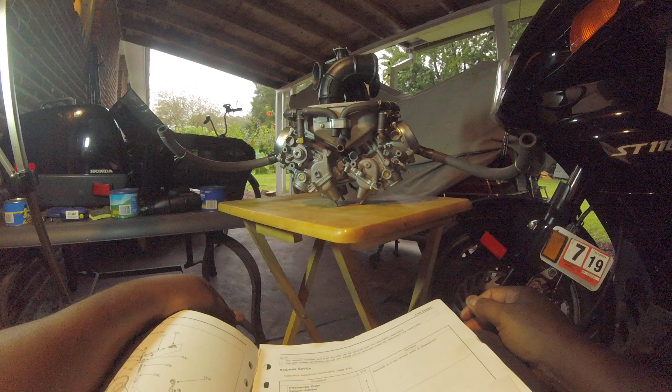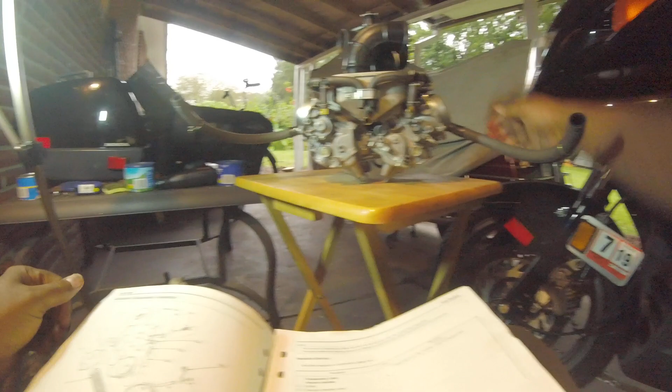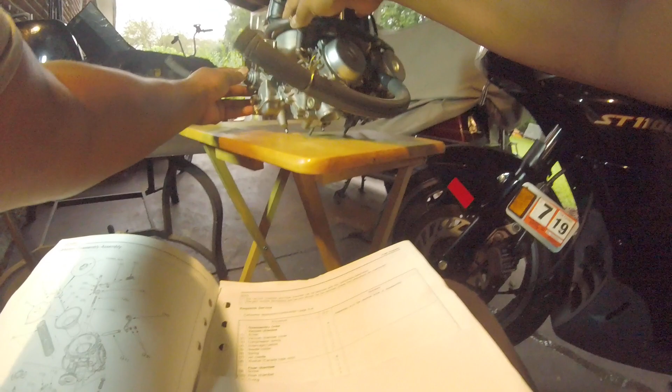Now that I have the carburetors out, here's the assembly on how the carburetors are numbered. Number 1, and again this is facing forward on the bike. 1, 2, 3, and 4. While you have the carburetors out, it'd be good for you to number them just like I have them here. 1 and 3, 2 and 4.

Now when you go to adjust the jets on the carburetor, you need to have this type of tool here. Like I said, they come in 2 different fashions. One has a screwdriver end, and the other one, like the one I have, has a flex end. Now they say in the book that you're supposed to take this flex end, come from the other side, loop it around, stick it on there, and make your adjustments.

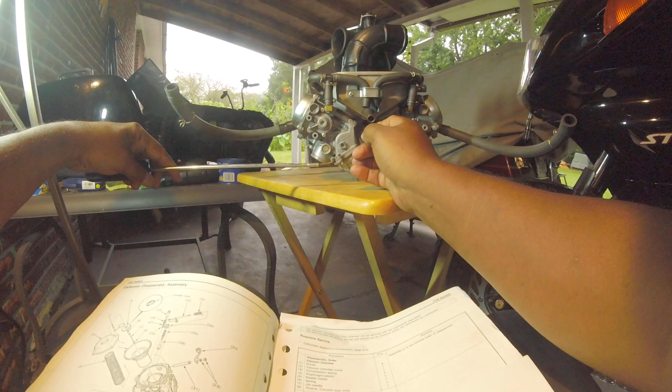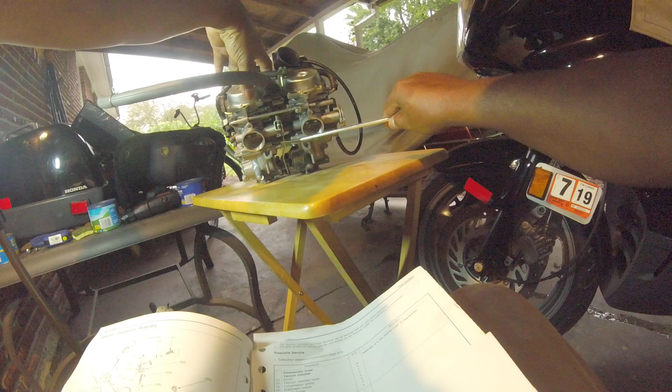It's not possible. The one in the number 1 cylinder is up on the front right. Number 2 is located right there. Number 3 is located in the back, rear right. And number 4 carburetor is right opposite of number 2.

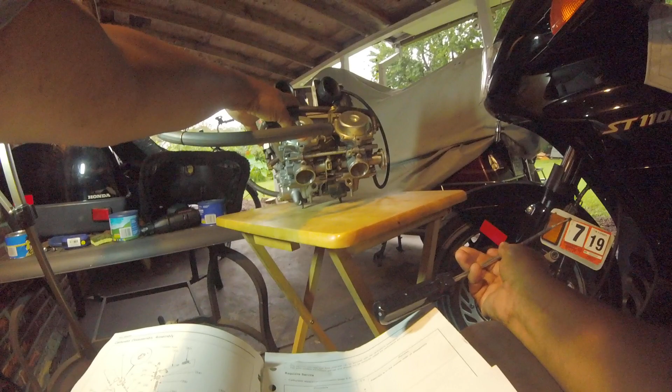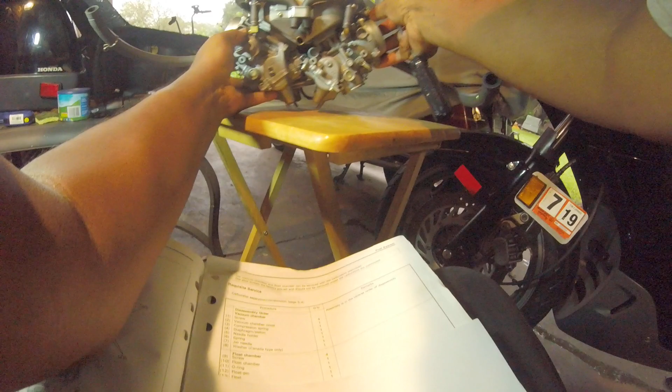So you have to stick your tool in, try to bend it, go inside and try to make the adjustment. This is a task you don't do too often because once you set them, they normally stay in place, unless you're doing a carburetor overhaul and just got to reset them. Other than that, you have no need for this tool.

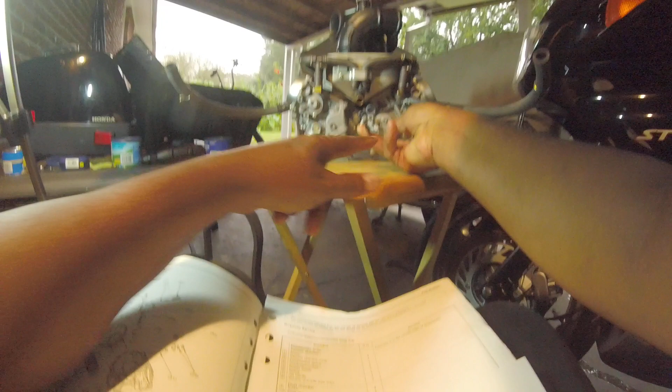Now the type of tool I have, hoping the camera's picking it up, notice it has a flat end on one end and the rest of it is circular. Alright, take a look at the screw. You'll see that the screw is the same way — flat on the top and the rest of it is circular.

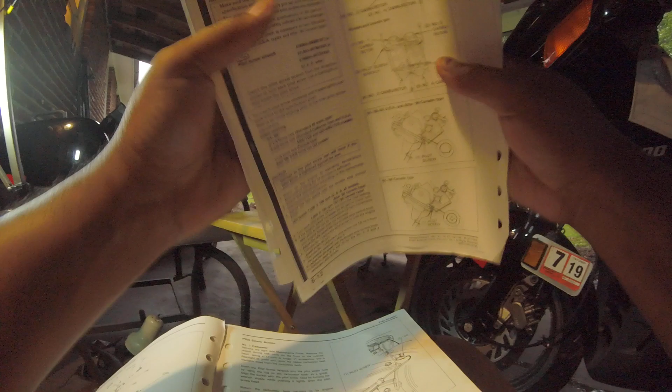Now what I'm going to do is kind of show you what it says in the book for what to adjust the carburetors at. And I had a loss for reading, I didn't go into too much depth. As you kind of see, it says for 91 through 96, 2 1/4 turns out, standard 49 state type.

I was in such a hurry, I said, well, I guess that's it. So I went with that, 2 1/4, which was wrong. I didn't read and see anymore. I saw where 2 5/8 turns out for standard California. I said, well, I'm not in California, blase, blase, it doesn't apply to me.

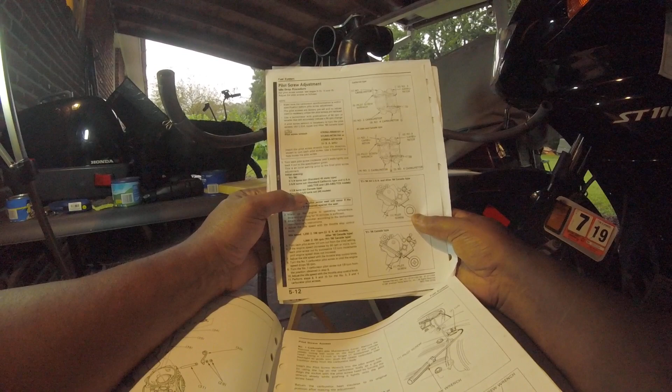Now my bike doesn't have the ABS, the ATC, and all that other information you see here. I failed to read anything further because I said either it was 49 states and 2 1/4, and I wasn't in California, I didn't have the emissions and all that stuff required for California. What I should have did was continue to read on, and it said after 96, and my bike is a 98, 2 5/8 turns out, all models. And that's why I failed to continue to read.

So sometimes it's just like working with wood — you measure twice, cut once. In this point, you tear the bike down once or tear it down twice. And I had to do it twice because I didn't read it thoroughly, and then go back and read it again to make sure I had the right measurement.

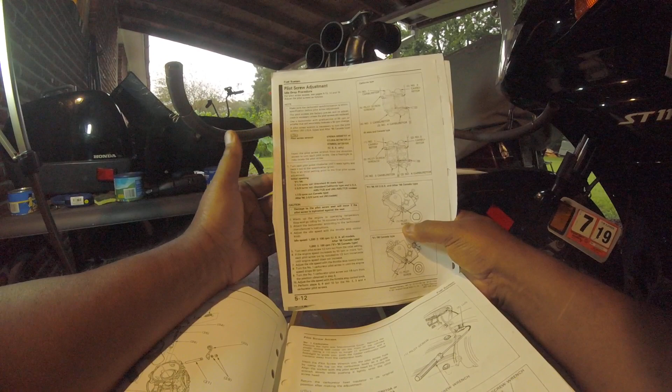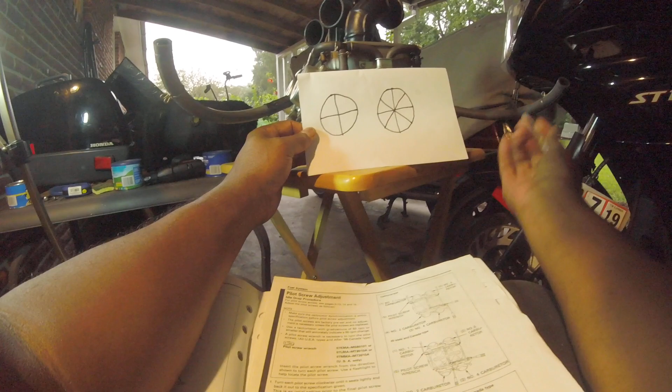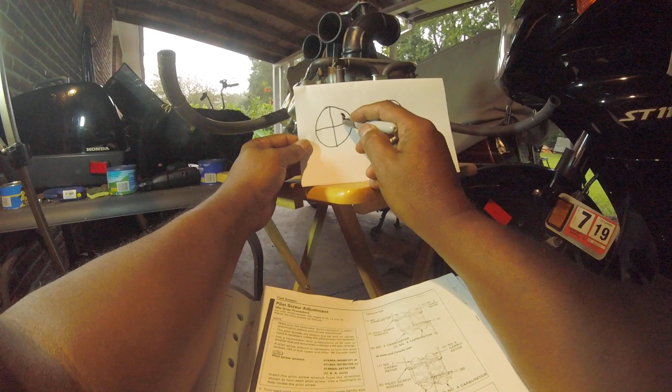So what I've got to do now, I've got to take and screw all of them back in and leave the 2 1/4 alone and go to the 2 5/8 turn. Now, I hate math, but this is what I came up with. When I did the 2 1/4, you have quarters — 1, 2, 3, and 4 quarters. I saw this, I said, well, go around once, twice, and 1/4. And that's the setting I set it on.

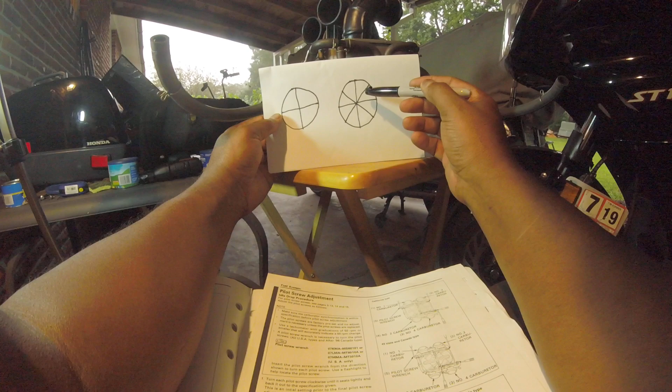But now what I'm going to do is that same thing. I took the quarters, I did the 1, 2, and then I did another 1, 2, 3, 4. So now I have it in eighths. So now I have to go to 5/8 — 1/8, 2/8, 3/8, 4/8, 5/8. So just imagine, once, twice, and now to 5/8. So I got to come to here.

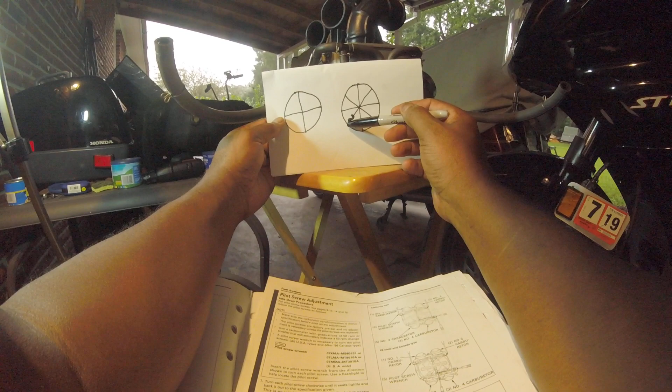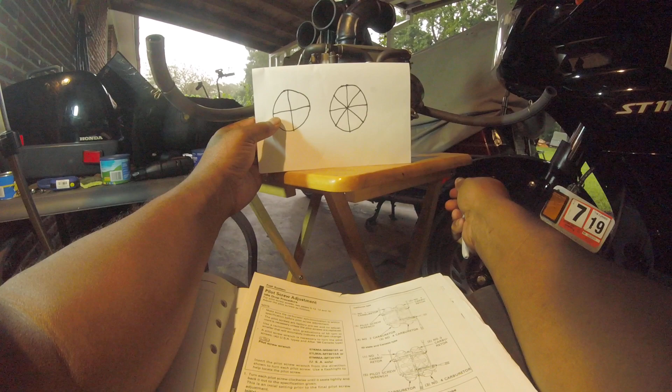Just imagine I stopped it here, so the adjustment between there and over to here did affect the performance of the bike. So by me setting that all the way down to here, I hope that alleviates the popping a little bit, because it was running so lean. And also too, it wouldn't really go too much over 85 miles an hour. And I said, that's not it, because that's not the way the bike has run before.

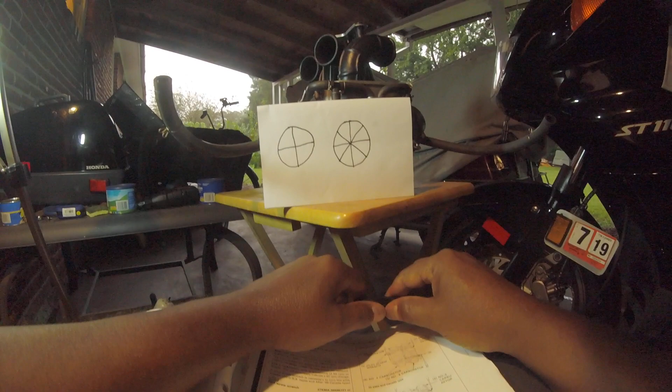And by me taking the carburetors off, when the guy put them back on, I guess he didn't put them back on right. And either it was drawing air, or it didn't get a good seal when I put them back on. Alright, so that's what I'm going to do. I'm going to wind up and show you the adjustments for 2 turns and 5/8.